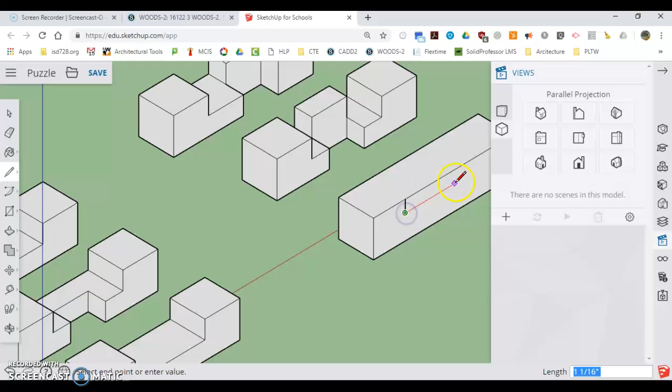If I do all my drawing right now, let's say I did some drawing on this piece here, and I go to push pull it, it's going to act like it doesn't push pull. It's because these are two separate pieces, because one was made outside of that component. So I'm going to undo that. That's a very typical thing that happens.

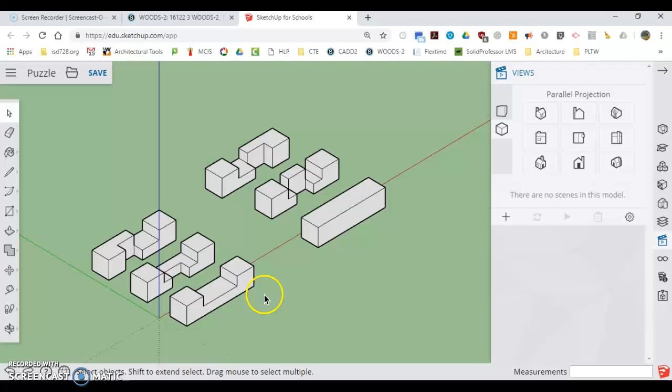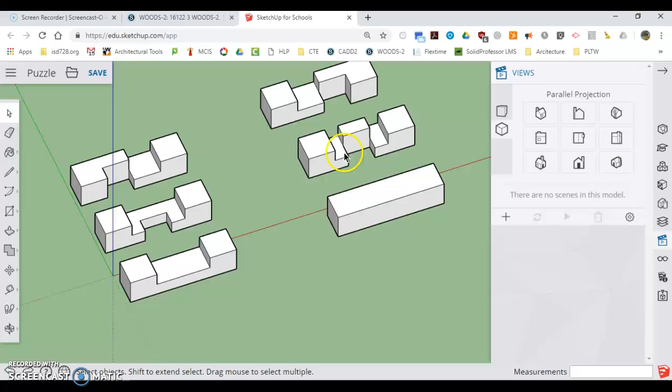So we made this piece last time, we made this piece last time here. We're going to be coming up to this piece here. This piece and this piece are very similar, they're just opposites of each other. And this piece here is a U cut this way and then two smaller cuts this way.

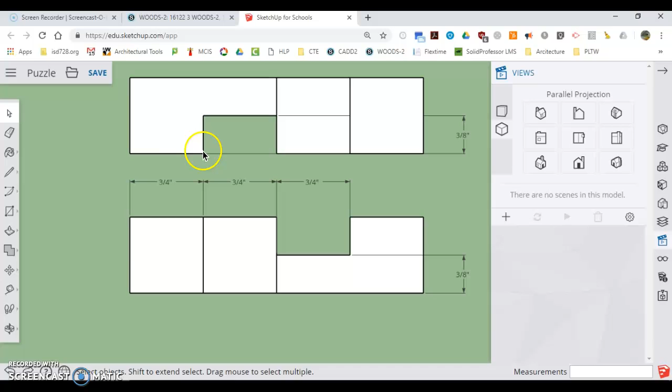So this one here is pretty simple, pretty straightforward. I will go to the view and give you your measurements here for this. This is in two views. So in one view, you have to draw 3/4 of an inch, again with the tape measure.

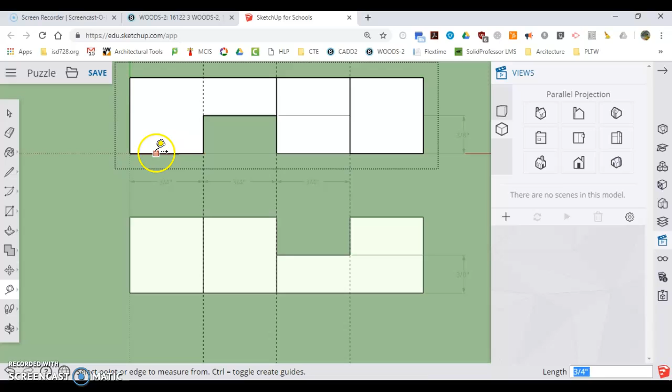And again, you're going to want to double click. Tape measure, click this line, bring it over 3/4, click this line, bring it over 3/4 for this and this, and you can even click this line and bring it over 3/4 as well to get to here. Bring the bottom line up 3/8 or to the midpoint, use your rectangle tool to draw a rectangle, and then you can push pull down through. You'd come and rotate to this side, use your rectangle tool to draw that, push pull through.

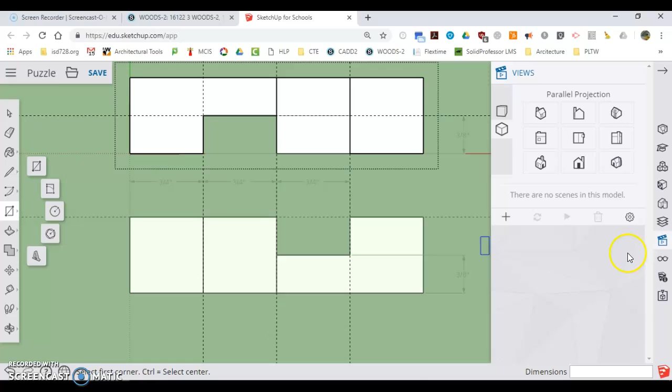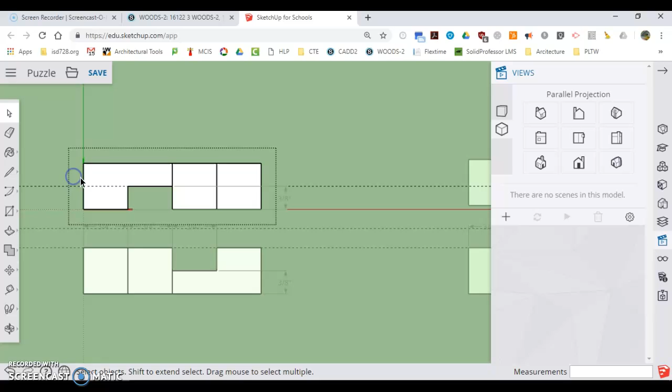And that would be that piece. The other piece is the exact opposite. So it seems like you should be able to draw the same piece twice, but you cannot. They are opposite pieces. So again, I'm going to hit delete guides here, use the eraser, and get rid of my guidelines because it makes them all over the place, especially when we're using components. But I'll leave this here for a second so you can pause this at this point and get your measurements and know what you have to create.

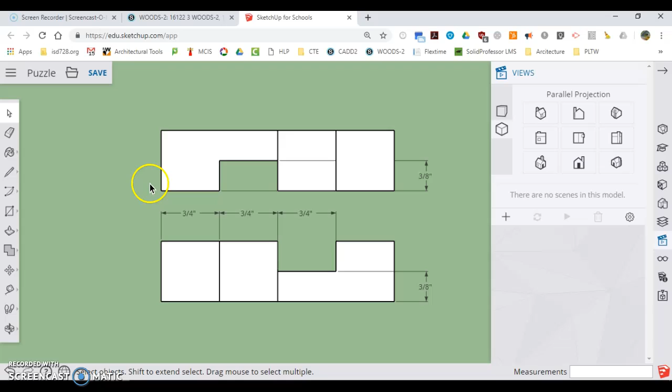So again, this piece looks like this. Cut here, and there are your measurements. Same thing happens with this piece right here. Same measurements, just kind of cut in the opposite way. Again, cut here, from the front back, here, top down.

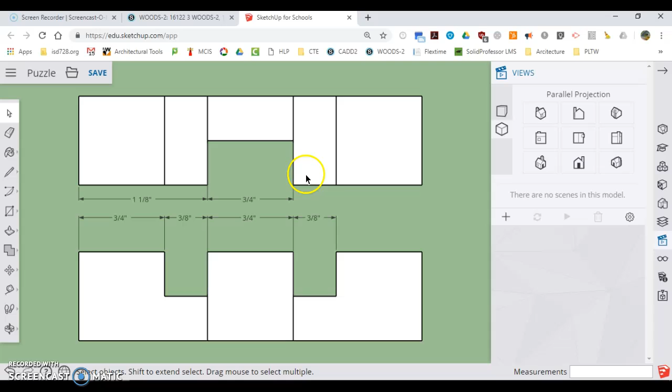The piece that we'll work on together is this piece here, because this piece is a little bit different. So if I look here, it's got these two 3/8 cuts, 3/8 by 3/8 cuts going down this way, and it's got a 3/4 by 3/8 cut going down this way.

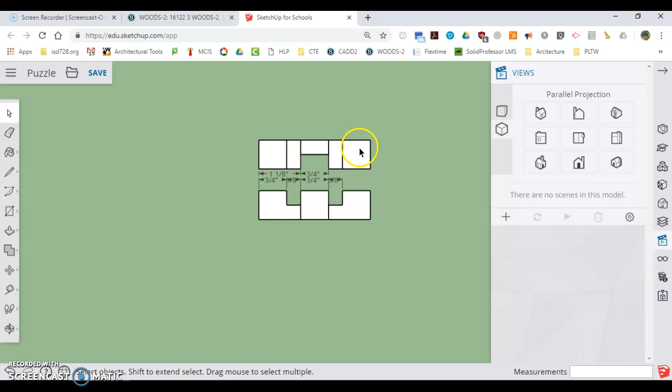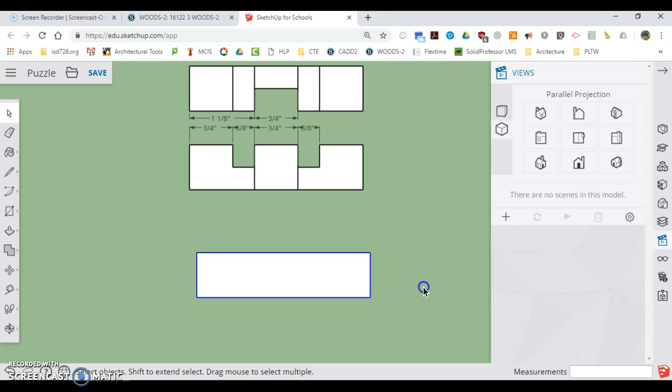So I'm going to get myself a new piece, take you through this process. I'm going to do something here I don't want you guys to do, but this is called make unique. So I have to double click on the piece. Now I got to go 3/8, 3/4 of an inch in, then 3/8. So I'm going to use my tape measure tool. Click here, 3/4, 3/8.

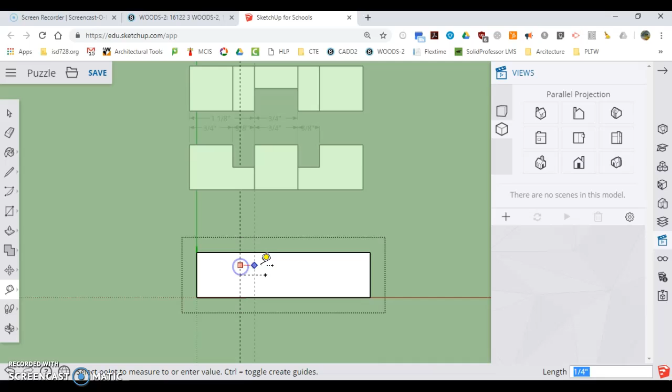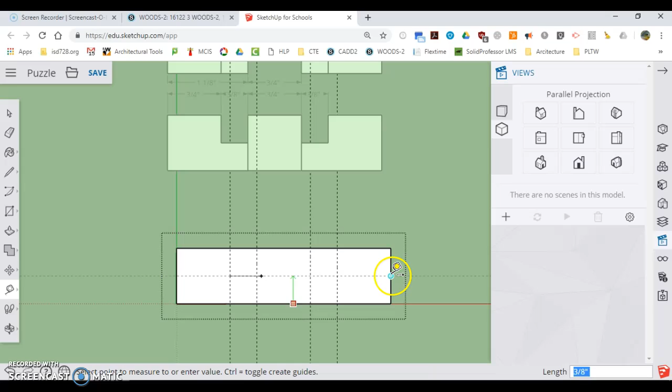And then it's 3/4 across again. And then 3/8. From the bottom coming up, it's to the midpoint. Draw my 2 rectangles. Nope, I missed it, so I'm going to hit the undo button.

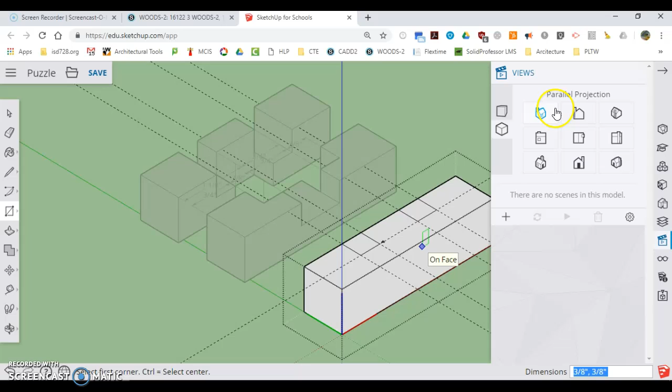Go into 3D view. And I want to get into the 3D view so I can see this edge that I'm going to be cutting. Push pull. Straight down. Straight down. Now it's a good point to pause this and do that yourself.

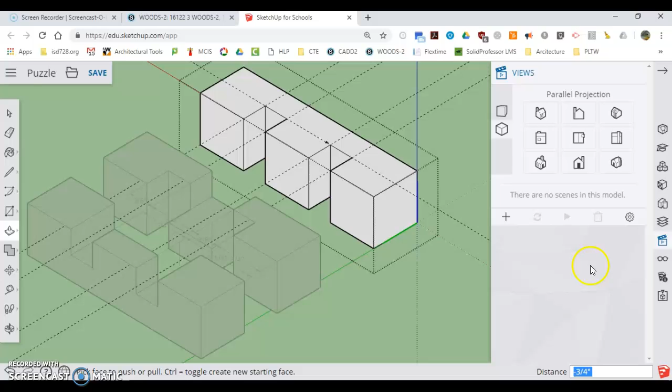All right, now we're moving forward. Get rid of these lines, guidelines right away. Now I gotta make this cut here. So I'm cutting this group out here. So I gotta come down on this face, come down 3/8 of an inch and push pull that off.

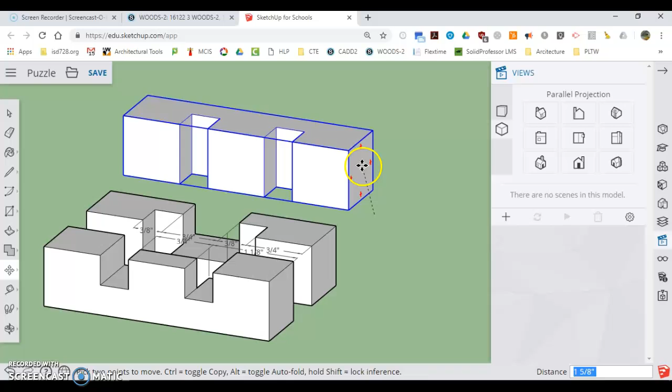So I'm going to move this up and out of the way for us one split second. Notice I'm outside of the model when I'm doing that. So when I click on it, it still turns all blue when I do my move. I don't want to be here when I'm doing my move because you'll notice a move does something ugly.

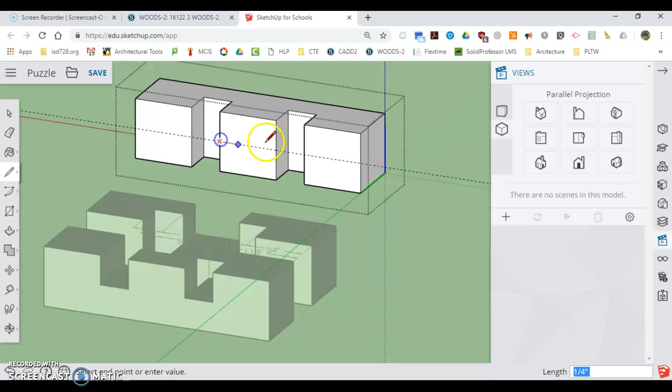This one's fairly simple. I just bring my tape measure from down here, put it on the midpoint, draw my line across. I can do this with a rectangle or I can just do it with a line. And I'm going to push pull this off down through here, and it's going to get stuck the first time because it hits this bottom surface. And I'm going to go a second time with the push pull all the way out the bottom. And that's how I create that piece.

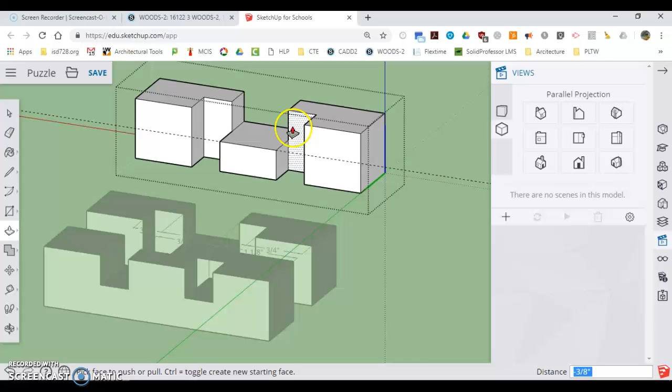Go ahead, pause, rewind as much as you need to, and try to create all of your pieces. Remember to save up where you're at when you're done.

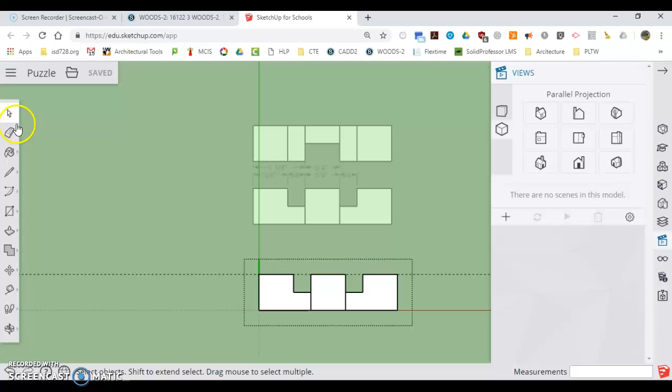So now I have that piece recreated. I'll leave it here for your dimensions so you can see what dimensions you need for this piece.